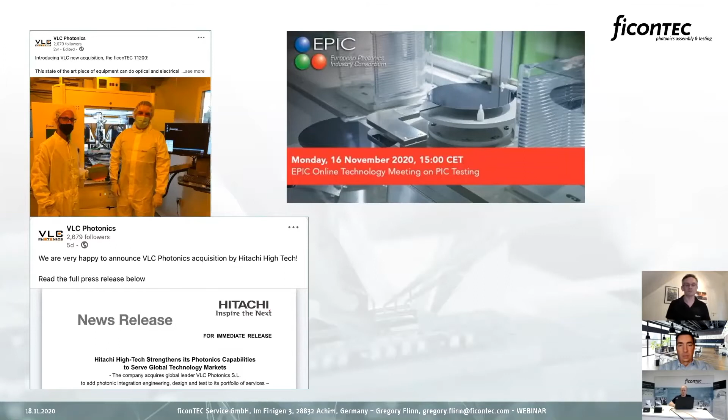So at this point, we'll move on to the topic we want to present. That topic is about artificial intelligence or machine learning based process control, and where that infringes, where that interacts, where that is visible in our activities and also within our systems.

An initial point perhaps, let's be clear about this: the application of AI and machine learning is not strictly new. All you need to do is refer to Industry 4.0, for example. What we are presenting here is the realization of the benefits for photonics assembly and test applications, not only in a lab or an R&D environment, but in a real many-machine, real world industrial setting. Through this work, we are realizing not only benefits for individual customers or individual hardware items, but we are effectively helping the evolution of our machines, so benefiting the potential customer target audience in general moving forward.

At this point, I will be handing over lead to Dr. Colin Dagwart from R&D, who is our specialist, an expert, for leading us through this topic and answering questions. Colin, lead on, and thank you for your time.

Thank you, Greg. Okay, I would like to start off with explaining a few terms that we use here. I think these things are often used improperly or not explained properly. So the main umbrella term that we're talking about here is artificial intelligence.

Let me read out the definition of artificial intelligence, as you find it online: this is the study of intelligent agents, that is, any device that perceives its environment and takes actions that maximize its chance of successfully achieving its goals. So as you hear, this is a very wide scope of different applications and different approaches to those applications.

And for an industrial environment, it is typically too wide of a scope. What we have in an industrial context is more a narrow scope and a specific problem that we're trying to solve. For these applications and for these use cases, machine learning most of the times lends itself better to solving these problems than other artificial intelligence approaches.

So machine learning is the study of computer algorithms that improve automatically through experience. And by experience, we mean data. It is seen as a subset of artificial intelligence. And these algorithms build a model based on sample data in order to make predictions or decisions without being explicitly programmed to do so. So basically, machine learning is really data-driven.

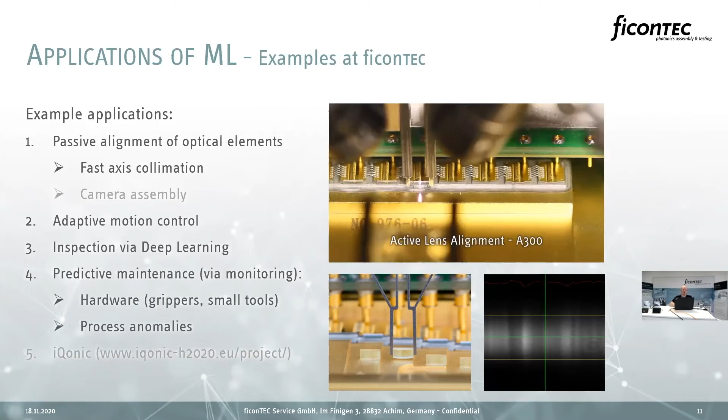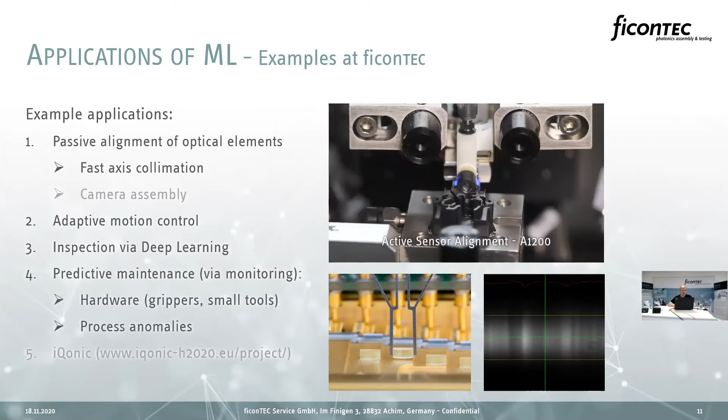If you look at the topics here, for the first topic we mainly used machine learning to understand what the data is telling us. The solution doesn't necessarily have to be machine learning based, but there's incredible value in using it for data exploration and visualization. If that can also be used for solving the problem, that's even better, but sometimes there's incredible value just in making data visible.

Okay, so I'll start with the first topic: the passive alignment of fast axis collimation lenses for laser diodes. Most of my audience will already know what this is about—you have an edge emitting laser diode that requires different lenses for different axes because of different divergence properties.

What we typically use for these kinds of alignments is what we call a beam characterization tool. It's basically a camera that looks at the beam, and by analyzing what the beam looks like, we can tell if it's already collimated or not.

So the difficulty here is really that we have a total of 6 degrees of freedom that we can align, because the system is overall sensitive to variations in the components, etc. The passive alignment is really not completely sufficient to tackle this, so we have an active alignment with 6, or rather 5 meaningful degrees of freedom. This can actually be time consuming, and time is money, so we want to make that a lot faster, and in the process probably even more accurate.

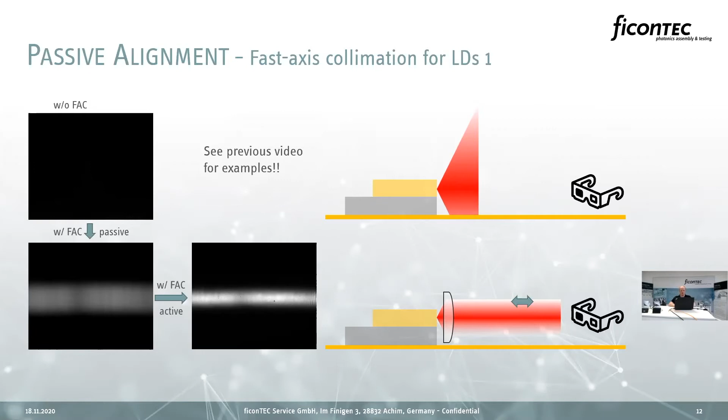So, next slide, Kevin, please. So what we actually did is first of all, we wanted to analyze if we can use the data that we have before the active alignment in order to predict the outcome of the alignment, which essentially means that we can just skip parts of the alignment. What we did is actually we used machine learning to calculate if we can actually see some clusters in the data.

First of all, I want you to pay attention to the purple cluster. On the x-axis, you see basically a measure of the beam width, and on the y-axis you see the displacement from the ideal focus position, so this is the difference in focus direction between before the active alignment and after the active alignment. Basically, what we wanted to do here is to be able to predict the outcome of the active alignment, so that we can just skip it, basically.

Is that correct, Colin, that you want to skip it, or you want to actually be able to predict an initial, a better initialization status? Yeah, you're right. Well, ideally, we would like to skip it, but in practice some part of the active alignment is really essential. So we still do an active alignment, but it only optimizes the last, say, 5% of the alignment.

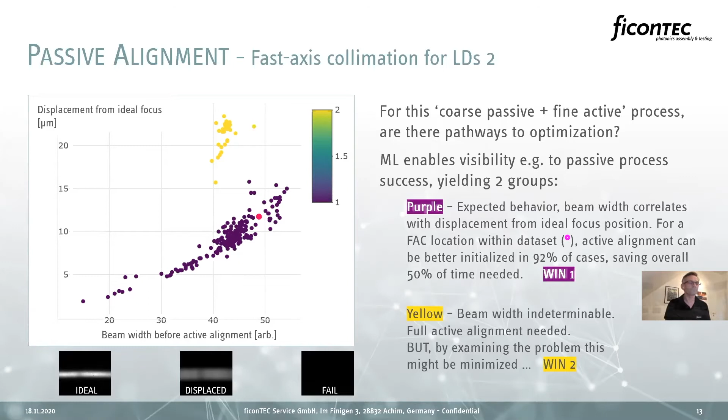Yeah. Okay. This initial step is a passive approach, so I guess the common expression is your mileage might vary depending exactly on what your hardware and component constellation is. If the components have different tolerances in terms of the recognizable features or geometrical features used for the passive alignment, that would change the constellation slightly and then maybe change this grouping. Okay, thank you. Okay, next slide, please.

Okay, so to our second implementation here. Let me begin by explaining how a motion system in our machines is typically configured. During the commissioning of the machine, we optimize the motion parameters so that it fits the application of the customer. During the programming of the machine, this is further refined, and when the machine is delivered to the customer, we can make adaptations and make sure the system performs really well in the environment it's placed.

However, if anything in the environment changes, this might actually have an impact on the system. By environment, I also mean if you place additional load on the axis system, if you have any wear on mechanical parts, or even have to replace a mechanical part, overall the motion system will act differently.

So the difficulty for us is those things cannot be properly predicted, and so we actually came up with an approach where we could optimize the motion system autonomously. Basically, the motion system optimizes itself.

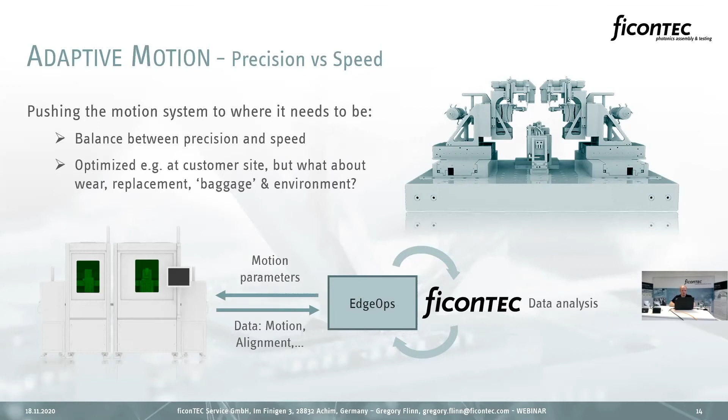And by doing this, we can basically have the system adapt in a way that it hits that sweet spot between speed of the motion system and the accuracy that is required for the customer components. There is always a trade-off between the two, and by analyzing the data that we get from the actual process, we can make sure that we stay in that zone where we hit the UPH goals of the customer. Okay, next slide please.

Okay, next slide. Can we go back a slide please? I have a couple of questions here. So I imagine this parameter set looks very different depending on, or rather this motion system optimization process looks very different depending on the exact task that your motion system has to carry out, right? If I think of pick and place on the one hand, and then think of passive optic alignment on the other, those are very different motion requirements.

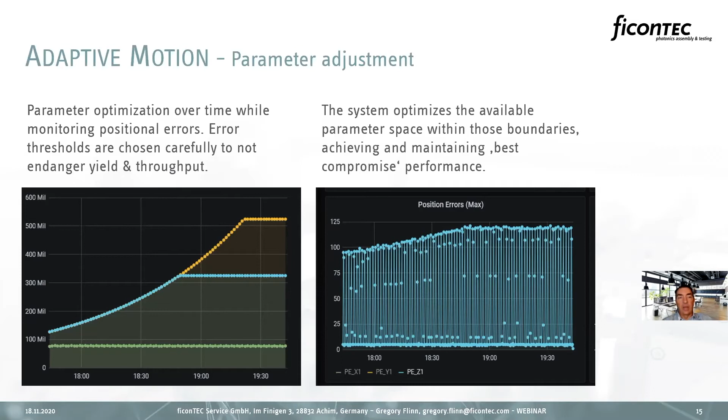Very good. Thank you, David.

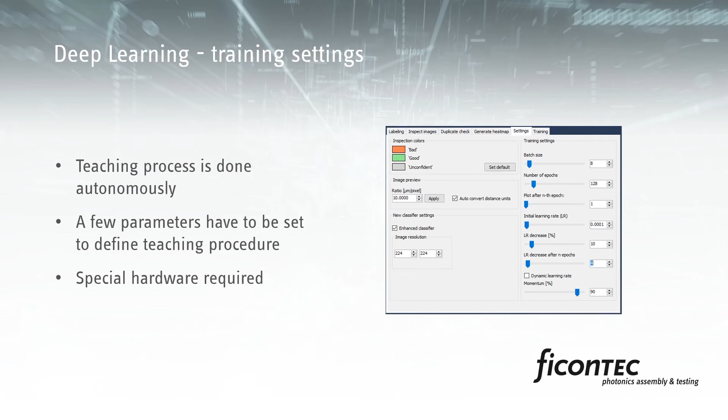Okay, so here we see a video about our visual inspection, based on a deep learning approach. We actually have a neural network with several layers, which is the definition of deep learning, and we use that to classify images of possible defects or good parts. One nice aspect of this approach is that the main work is basically assembling images and putting them into different folders corresponding to different categories of defects or good parts. If that data is present, all you have to do is have the neural network learn based on that data, and thereby extract the network and apply it on your machine.

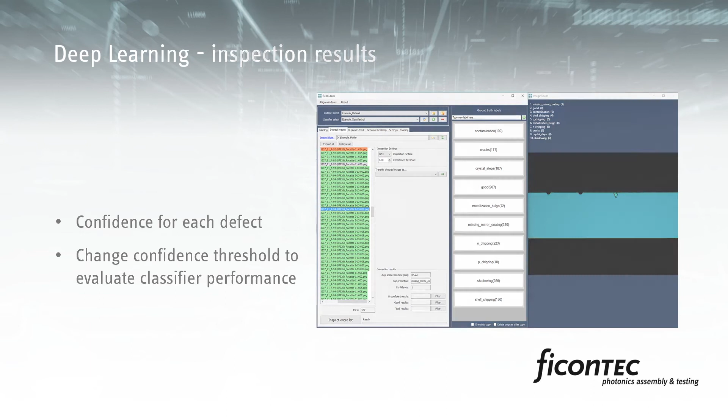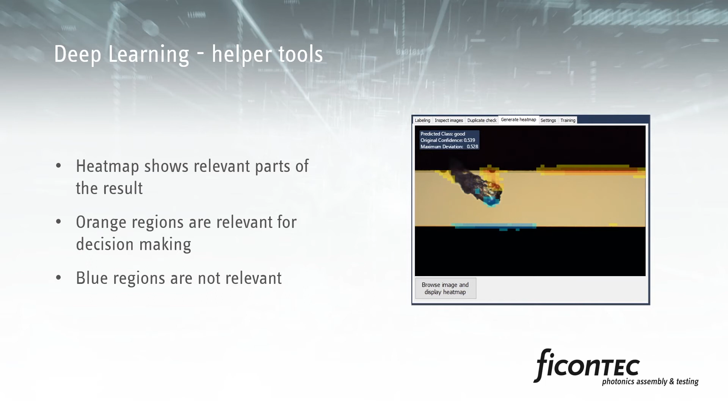So the outcome of such a classification is not only the classification itself, but you also get a confidence value. The neural network tells you with which confidence it identified a defect or not. By thresholding that confidence, you can make sure your system is very robust to different changes, but also make sure that for images where you're not confident, you can still use human intervention.

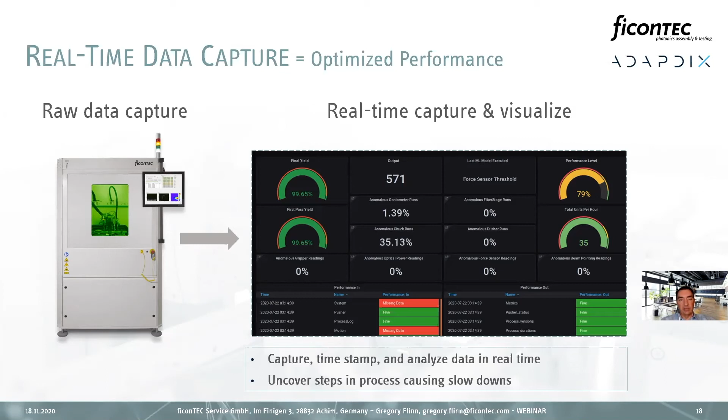Okay, thank you. Let's go to the next slide. So here's a couple other abilities, and again, very customizable dashboards - you can see the one on the left is similar to the first one.

The one on the right, we work closely with clients as well as with ficonTEC in identifying the right parameters to measure and monitor.

This is all about real-time data streaming. I want to highlight that we are an edge-based solution versus a cloud-based solution. What edge means is a couple of benefits. The data is secure, you're not sending it out to the cloud. Given the amount of data we're gathering and analyzing, sending that to the cloud could wind up being very expensive. Also, because we're at the edge, literally on the ficonTEC piece of equipment, you're able to capture that data in milliseconds. So we see a very significant advantage to being on site at the edge versus exporting the data out, doing calculations in the cloud, and sending it back.

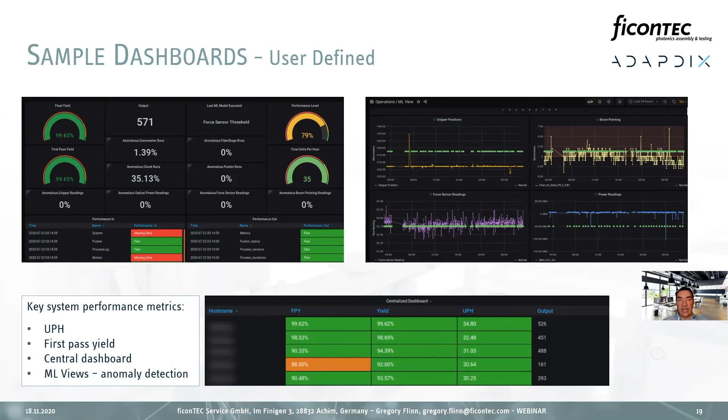We're then working with the customer to say, hey, what does good look like on this? Let's go to the next slide, I think that's probably a little better visual.

Thank you. So now that we have the data streaming and visualized, we start identifying the parameters you want to track, and then look at what the anomalies are. What you can see here on this screen is the orange dots, and this anomalous or potentially anomalous behavior. We'd work with the client, process engineers and others to identify - hey, we noticed this happened and it seemed a little bit out of spec, was there a problem on the equipment? Turns out it's a pretty good predictor of that. So back to your question, we can start training the models within 2 weeks, start seeing results after maybe another 2 weeks, and then start really deploying to maximize the impact of the software.

Good, thank you. Okay, let's go to the next slide.

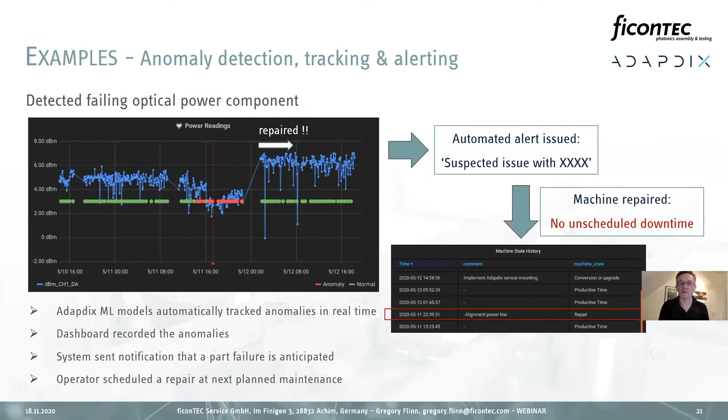Exactly. Okay, let's go to the next slide for a couple more examples.

Okay, very clear. Thank you.

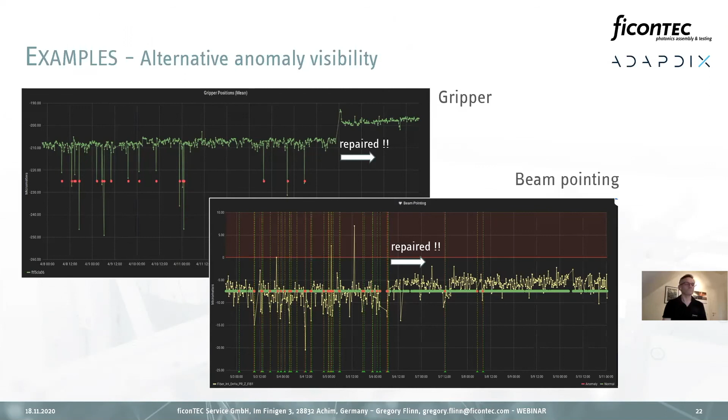So there's another aspect to this—not only anticipating predictive maintenance and when you may need service, but also actually looking at how you maximize the UPH relative to an issue that may be occurring.

So to a degree, I guess this is providing a sort of holistic level of visibility to the process, or to the production as a whole, rather than focusing on anomalies appearing in individual hardware components.

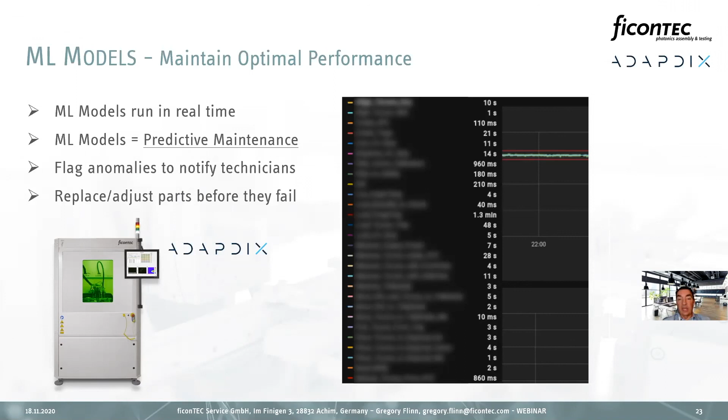Okay, good, thank you. That brings us to the end of the main topic here. It's obviously been for us an interesting topic. We've overrun somewhat on time, but hopefully anybody who's not still around to see this content can watch it on demand at a later date.

What we've seen so far is how AI and ML is implemented here at ficonTEC on several levels, who we are working with, and that this activity has a measurable degree of momentum—we are certainly not early learners in this field, so we have a lot to offer.

And the essence of the message is, if you have a potential production issue where you feel machine learning may be able to help with problems you have, or in general could be beneficial to the goals you've set yourself, get in touch, and we can sit around a virtual table and speak about your requirements and see exactly how this implementation can be useful for you.